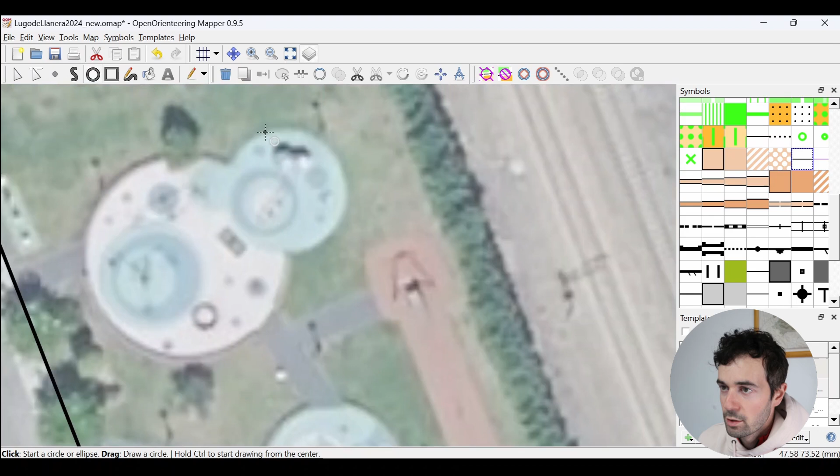So you can see it's got these kind of funny playground shapes, paths between them, and we want to use our fundamental shape, so like the rectangle, to draw this. Let's use the circle to draw these. And then this guy over here, probably just quickly get this part done with a rectangle.

There. Now, let's get the paths drawn. So I'm just going to try and pick the right kind of width. And we're just drawing everything kind of over each other, and we'll come back and clean it up. Okay.

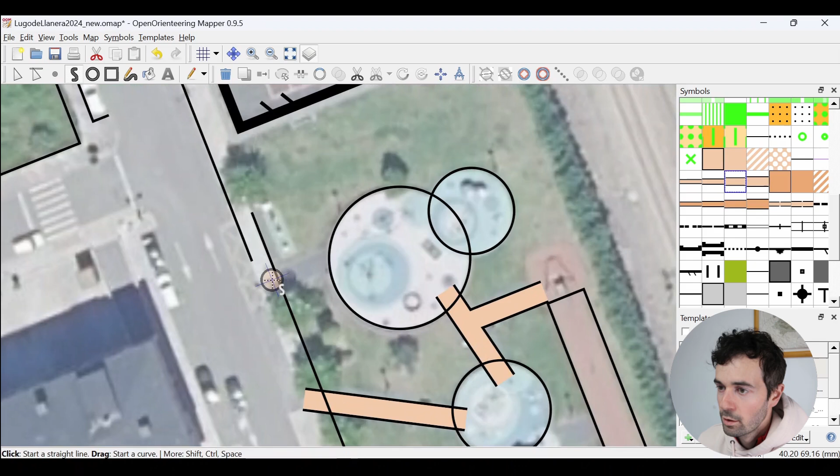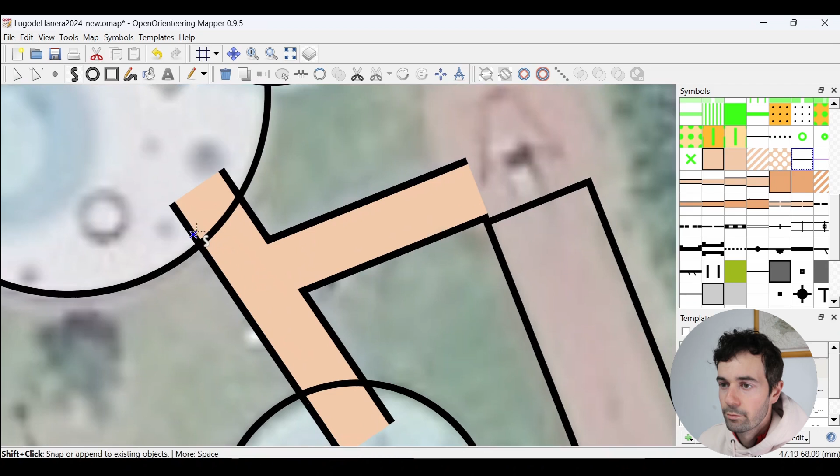So now what I want to do is just draw the edges of the path with this step symbol, because then I'll be able to join all the step symbols up together.

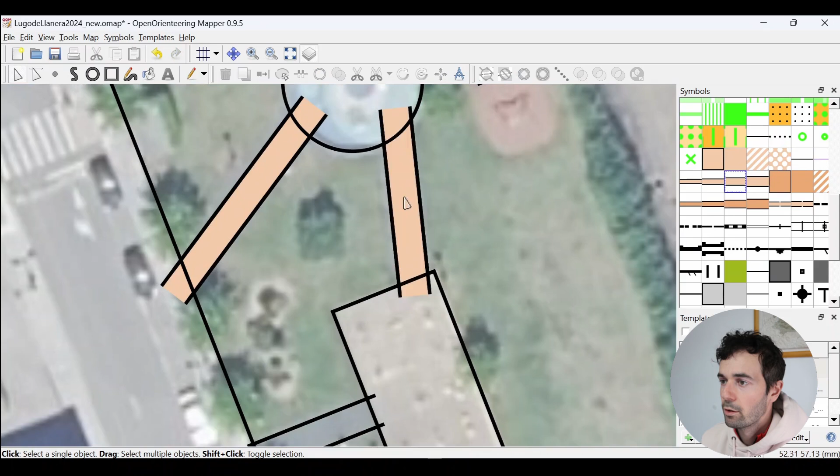Okay, so I've drawn all the outsides of the paths with steps, so I can now get rid of the paths. What did they do for me? Well, they gave me the fixed width, and they made sure that the lines on either side were parallel. Okay, so now we have a bit of a mess, and it's time to start cleaning it up.

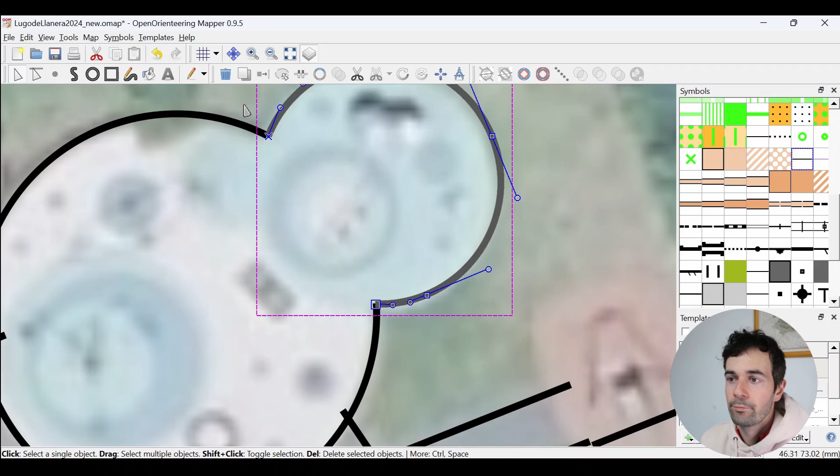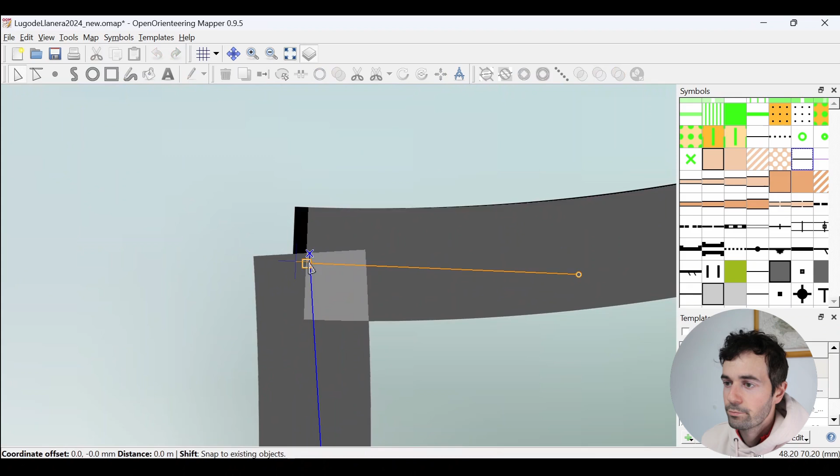So obviously these circles, I'm going to have to cut them and then join them up. So when joining up, just try and make sure that the X and the square are more or less on top of each other. I have one over here as well, so before joining, which will join both sides, I want to make sure that I fix this side and this side over here. And now we've joined up those circles and ended up with this funny shape.

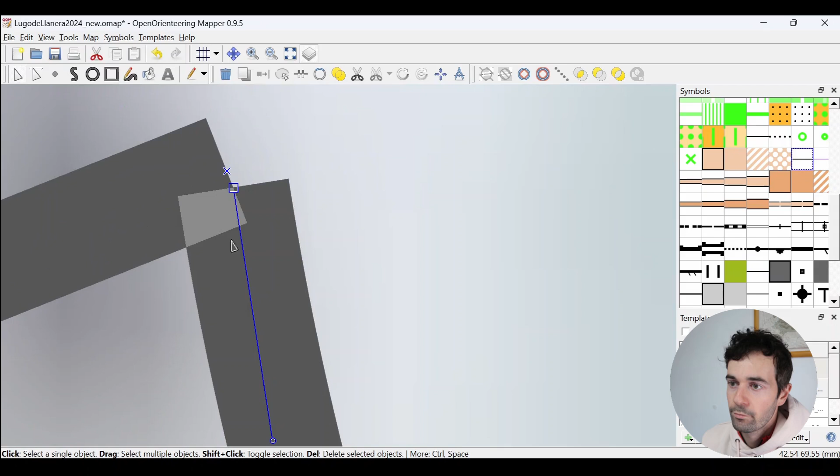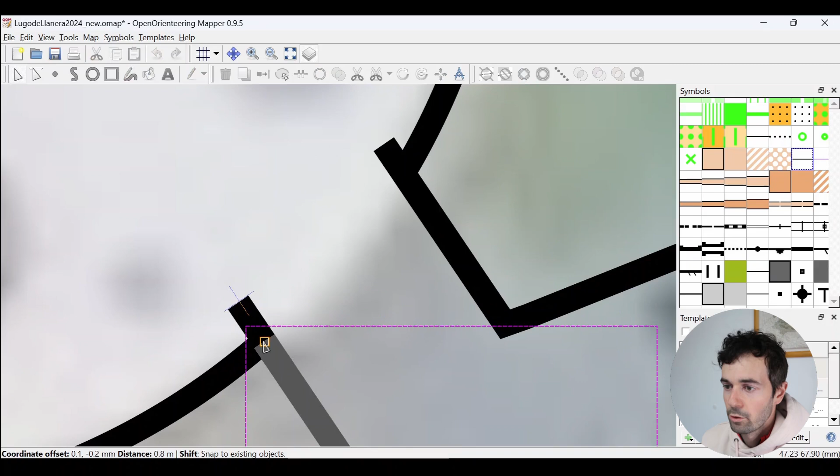Let's cut the circle again where it's intersecting with the paths. We'll just drag this back. And finally cut it over here. Again, drag this back. And join them up.

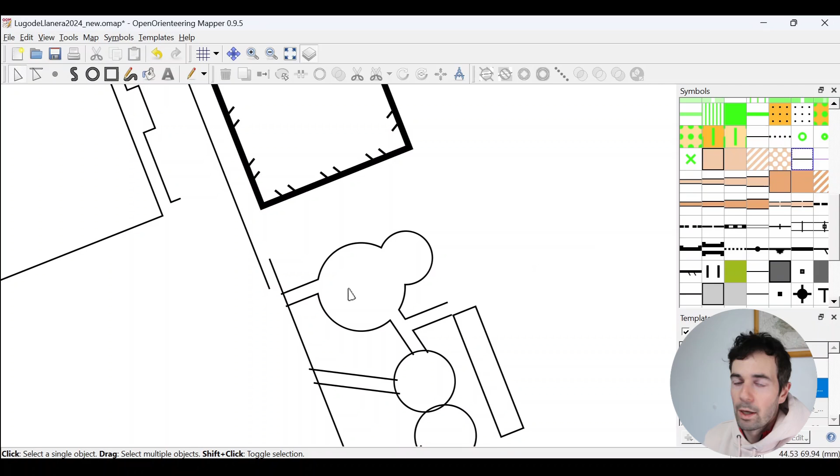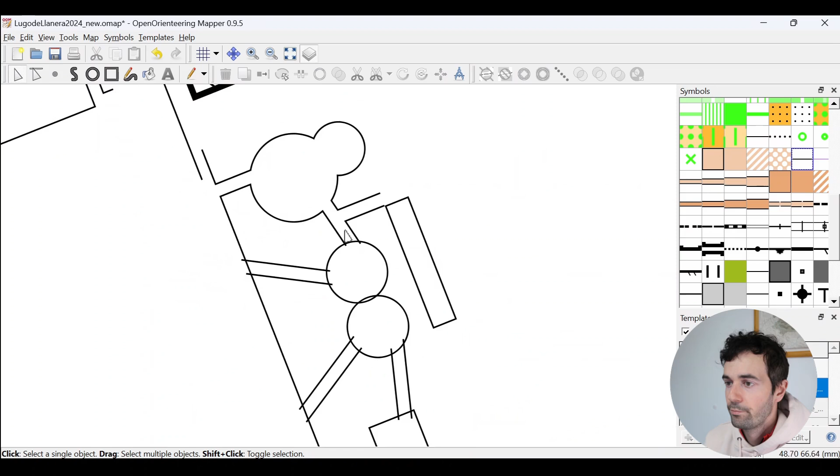And there we go. We're starting to get this complicated shape, but we haven't drawn anything really ourselves. We're just building off circles, rectangles, and of course, using the path symbol to give us this fixed width parallel lines. So we need to keep going with this. I can actually select both lines at once and then tidy it up and then join. So we'll keep going. There's quite a bit of this to do.

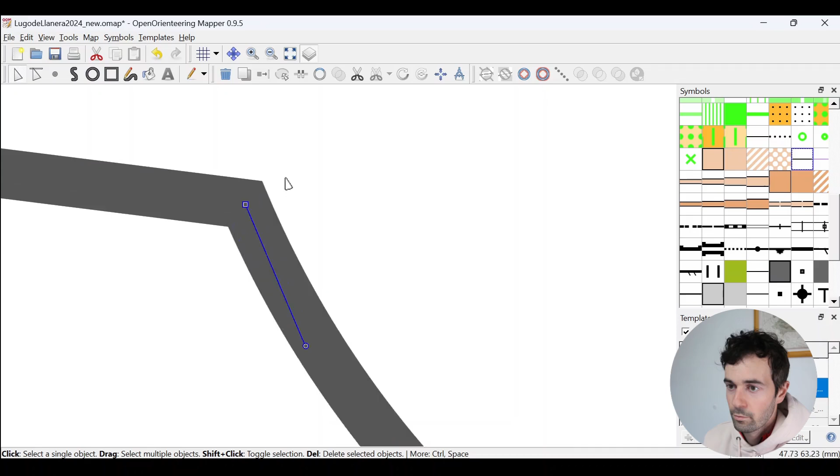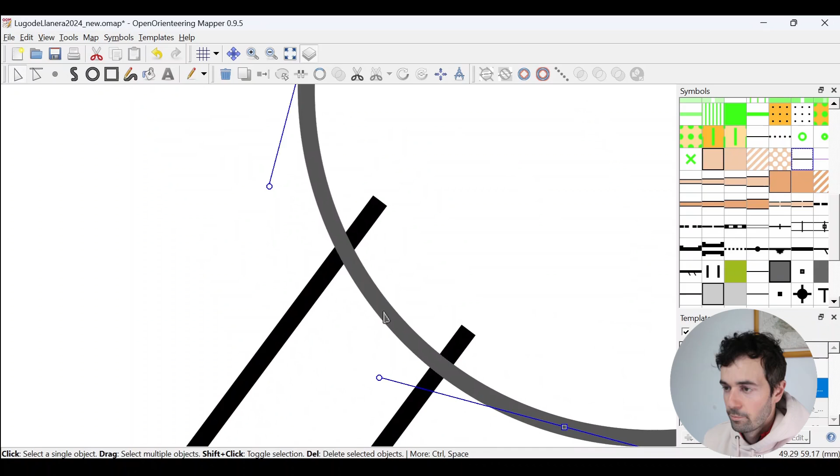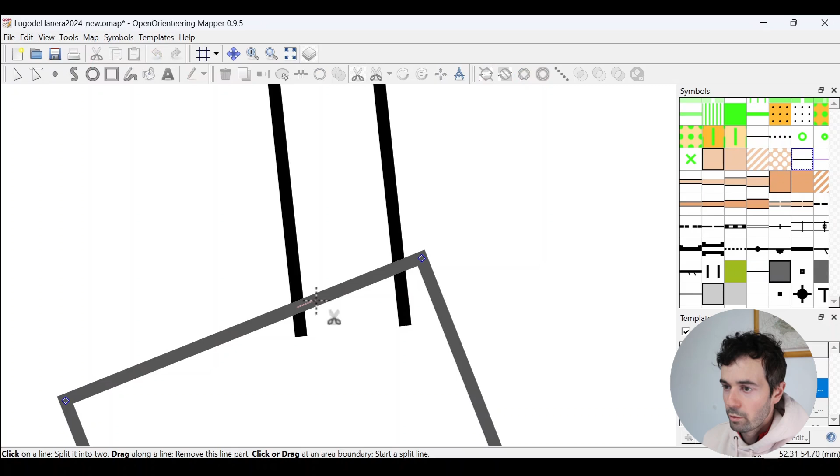And then we're back to two circles. So we're going to want to cut both the circles and then join them up. Now we're already over to our rectangle. Cut. And obviously you get pretty fast at this when you have practiced it.

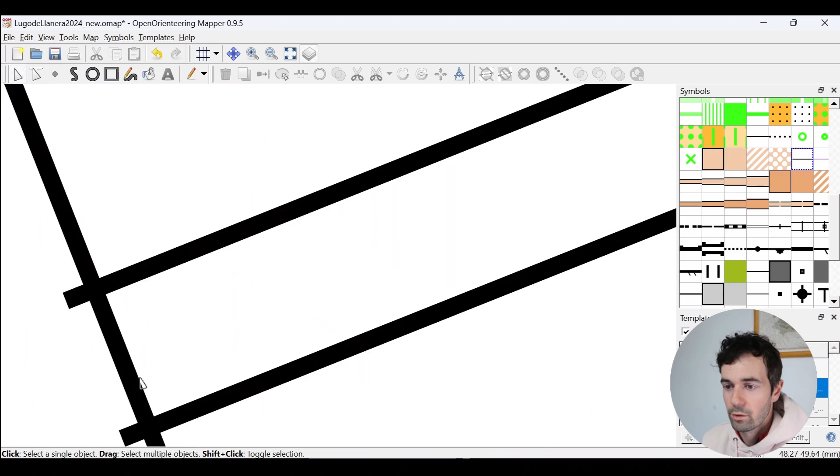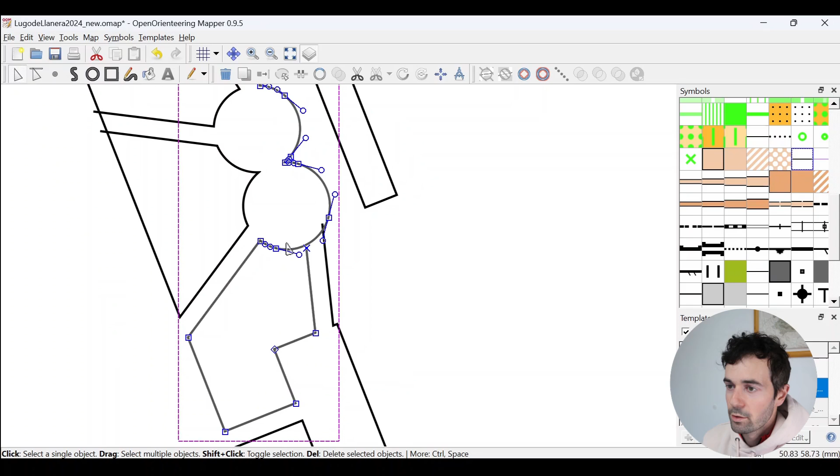Okay, and we're missing one over here. The final edge. Okay, so this is a little bit messy now because this is the same edge. So I just wanted to drag this. This was up here. I wanted to drag it back just so I can cut the part that I want from the circle. And then we'll bring it back to where it was. And over here.

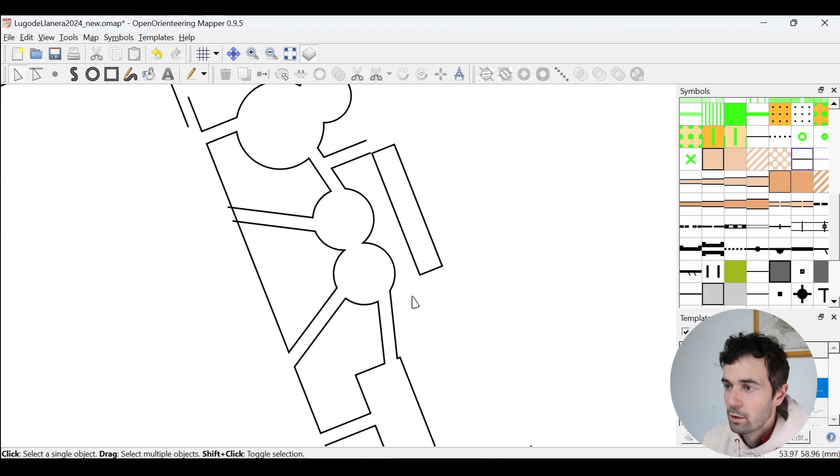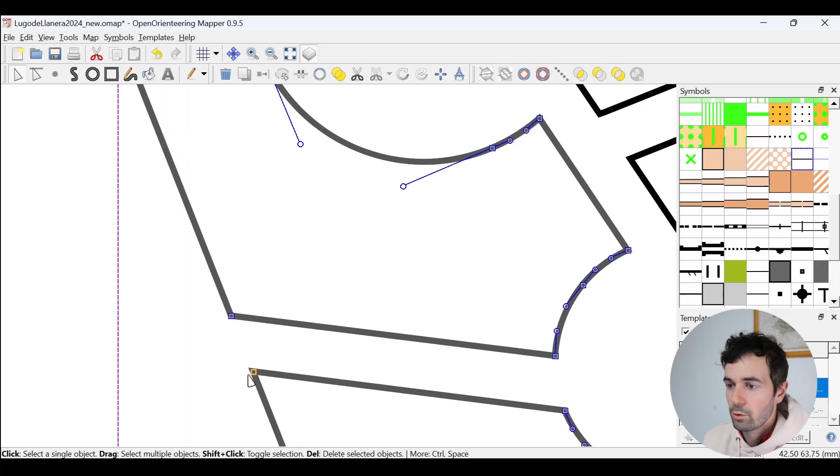Missing one final piece. And again, because we've got now the same line crossing over itself, cutting becomes a little bit more challenging. And we just drag things out of the way temporarily to allow us to cut and then bring it back. Let's have a look here.

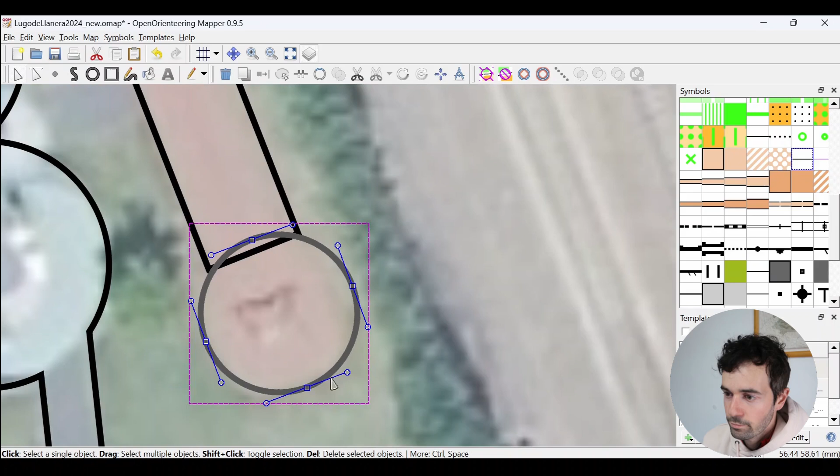I'm not really sure what shape this is, but let's just imagine, for the sake of example, that it's a circle. Something like this. I'm guessing the other side will be the same size. Okay, so then we would want to cut this part of the rectangle, cut this part of the circle, and join.

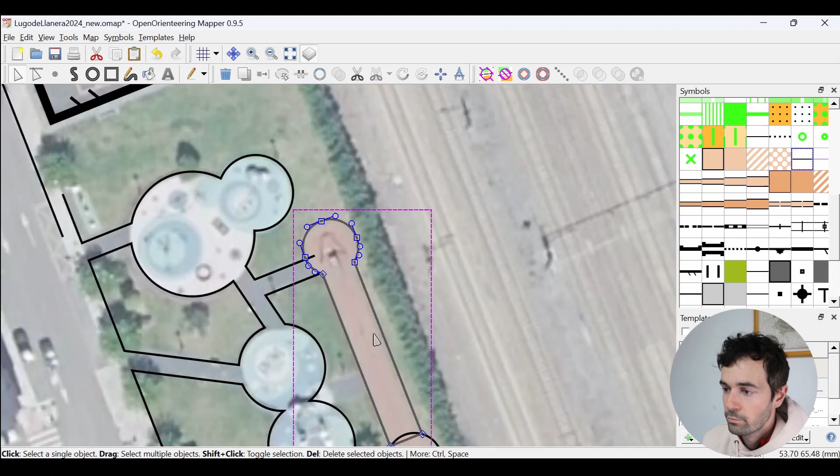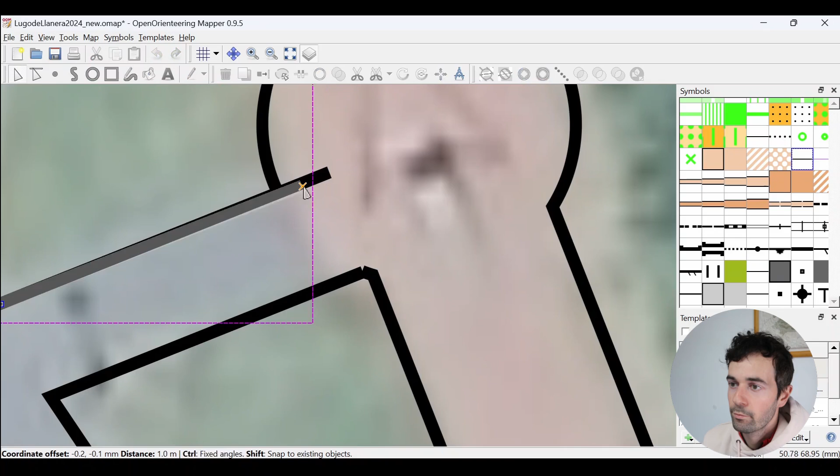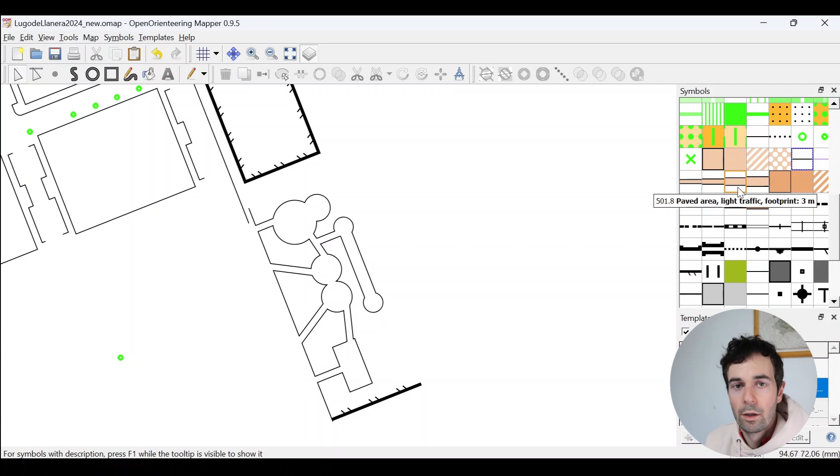And finally, join this part of the circle to what used to be a path. Right. And as you can see now, this complicated shape has been drawn without too much struggle. Everything that should be parallel is parallel, the opposite sides of the path. All these paths, they have a fixed width as well because I made use of the path symbol and then drew steps on the sides of them.

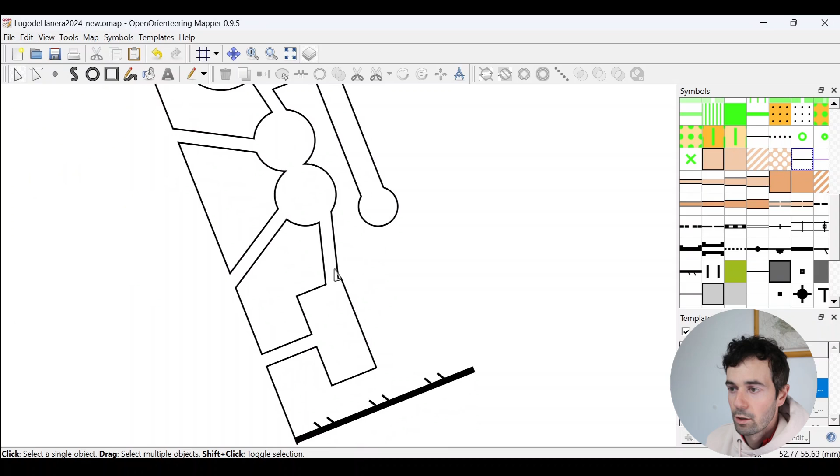These circular areas are perfectly circular because I made use of the circle drawing tool. And again, over here, these edges are parallel because we drew them with a rectangle. This area down here was originally a rectangle. Now it's a funky little shape. So this complicated shape was actually really easy to draw in the end.